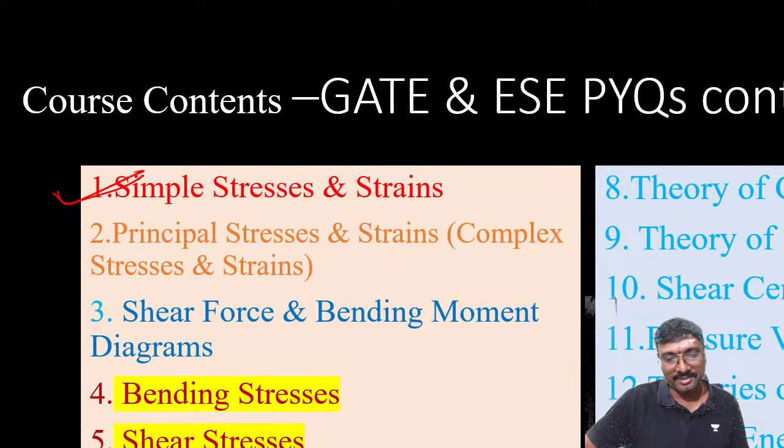Now coming to this. So we'll be starting with which one? This is the first chapter, simple stresses and strains, right? So this is strength of materials, GATE and ESE PYQs. Properties of materials and simple stresses and strains you are having, right? And now this is the first question. Try to select the answer, all of you. I'll be starting the timer.

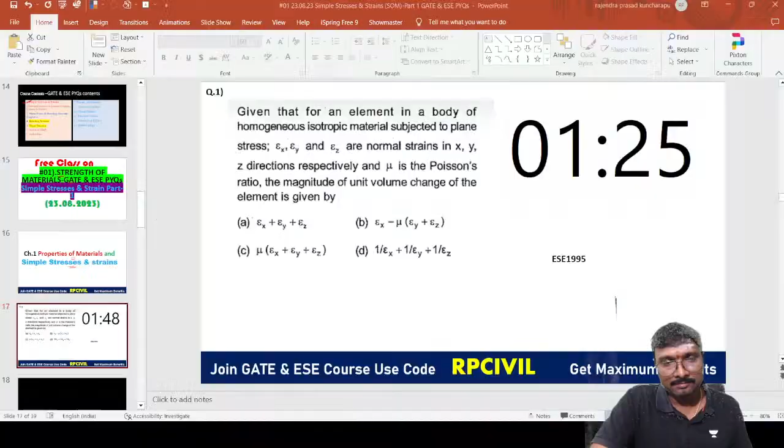Some problem occurred here. Okay, let it be. We just try to solve it, everyone. One sec. Video capture, okay. One second, now it will come. Now it's looking clear, yes or no? Now it should be working. I'll give the timer for this, all of you. Reset and start. Now also it is showing half only. Arey yaar, why? It is not visible now.

Okay, this question is visible, right, everyone? So question is visible now. You just solve this question and tell me the answer. Which one is the correct answer? Stunning Tunes said A is the correct answer. Okay, we'll just check which one is the correct answer. 40 seconds more time is available. Anyone else tell me any other answer?

Given that for an element of a homogeneous isotropic body subjected to plane stress, epsilon x, epsilon y, epsilon z are the normal strains in the x, y and z directions respectively, and mu is the Poisson's ratio. The magnitude of the unit volume change of this element is given by? So what is the meaning of unit volume change? Unit volume change is nothing but delta V by V.

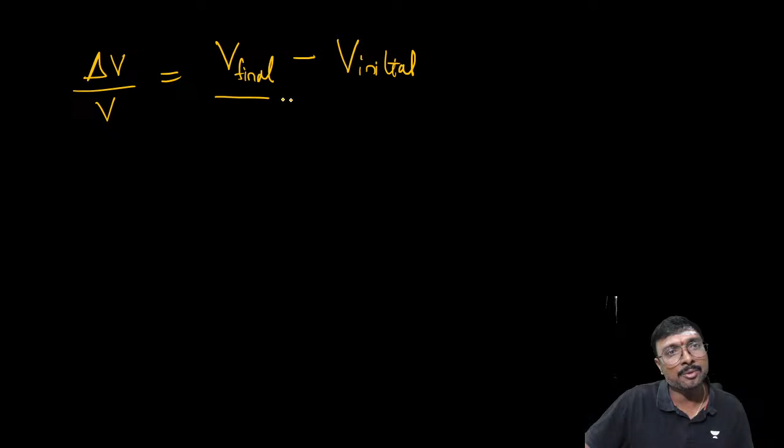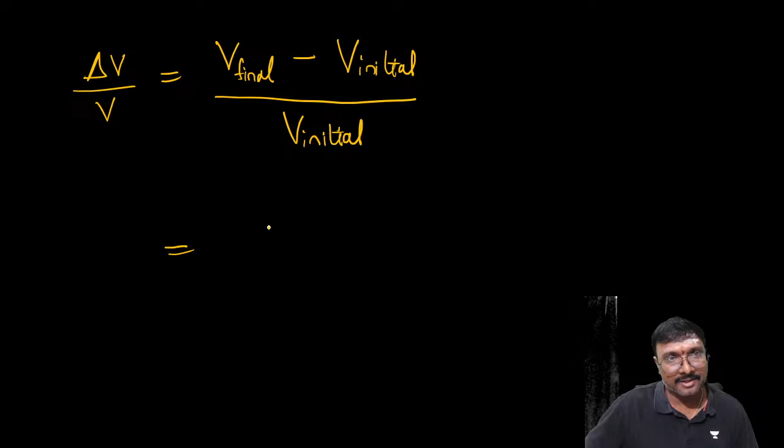So what is delta V by V? We can say it is final volume minus initial volume, divided by the initial volume. So what is the final volume, everyone? Initially it is L into B into H. So the final volume is length into what?

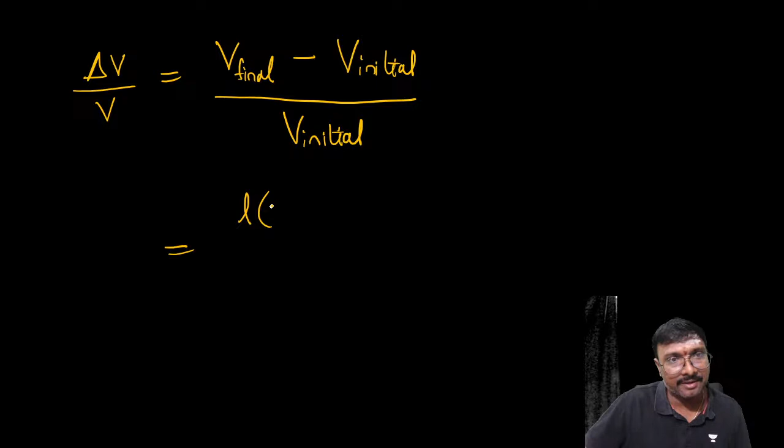Length into 1 plus epsilon x, into width B into 1 plus epsilon y, into depth D into 1 plus epsilon z. So that is the final volume, right? Minus the initial volume, L into B into D, divided by the initial volume.

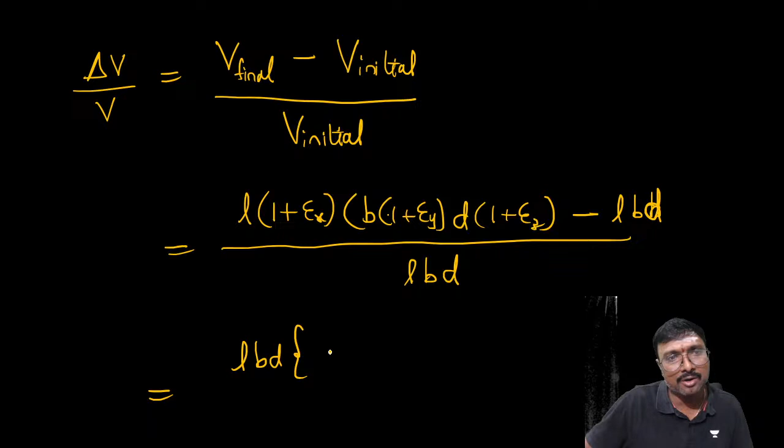L into B into D, right? If you just take common, what is it? You can take common LBD. If you take common, 1 plus epsilon x into 1 plus epsilon y into 1 plus epsilon z minus LBD, length into width into depth or height, divided by this LBD. So we can cancel this LBD everywhere, right?

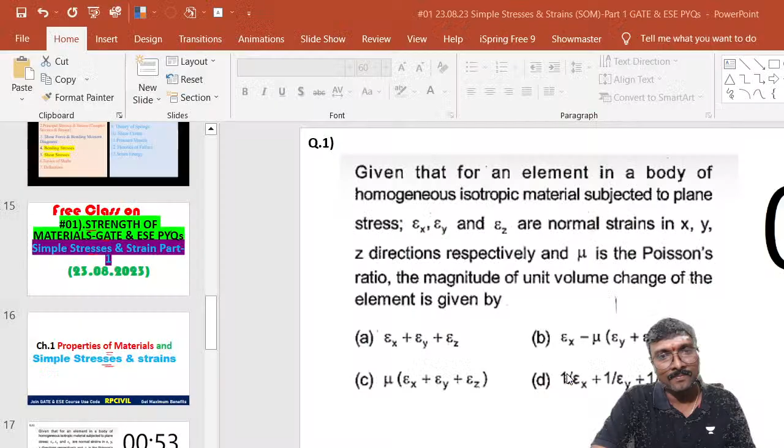Now if you simplify that, what is that you are getting, all of you? Anyone tell me? One plus epsilon x plus epsilon y, right? If you simplify this, it is 1 plus epsilon x plus epsilon y plus epsilon z.

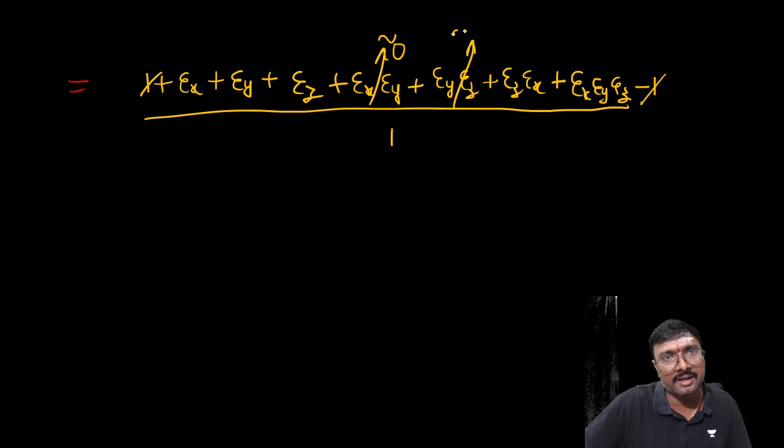1 plus epsilon x plus epsilon y plus epsilon z plus epsilon x into epsilon y plus epsilon y into epsilon z plus epsilon z into epsilon x plus epsilon x epsilon y epsilon z, minus 1, right? So this minus 1 and that plus 1 cancel, divided by 1. As these terms are approximately neglected to 0, finally delta V by V, that is your volumetric strain, will be equal to epsilon x plus epsilon y plus epsilon z. This is the first method.

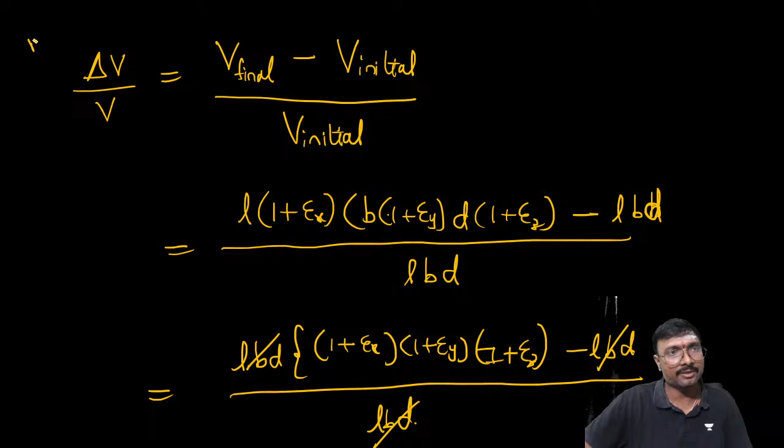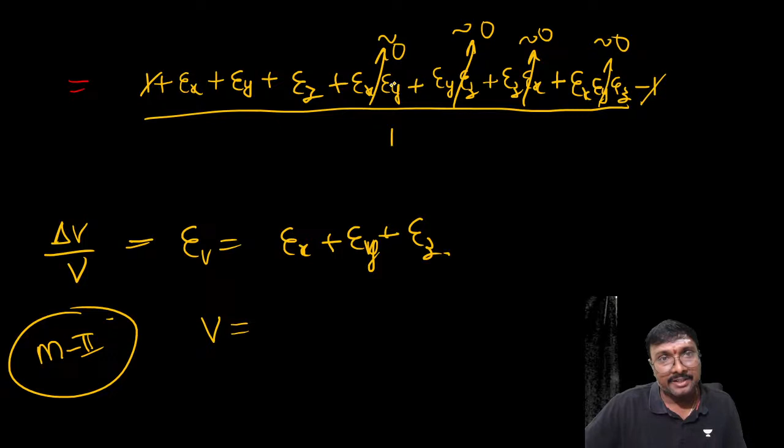Now the second method. Mu is also there, but there is no use of this mu. Element of a body in homogeneous normal strains in x, y and z directions respectively; volumetric change we have to find out. These product terms are neglected to 0, because strain itself is very small, like 10 power minus 5 or minus 6. When you multiply two 10 power minus 5 values, you get 10 power minus 10, which is negligible. Even if you consider it, it does not have any influence.

Now volume is equal to x into y into z. Now tell me, what is dou v? First you consider x and y separately and z separately. Do you remember that differentiation of uv will be equal to first term as it is into dv plus v du? Do you remember this, all of you?

So u dv: first term as it is, x into y, into differentiation of z, which becomes dou z. Plus you keep this z as it is into differentiation of x and y. Differentiation of x and y means again the same concept we have to apply here. How can you apply this same concept here?

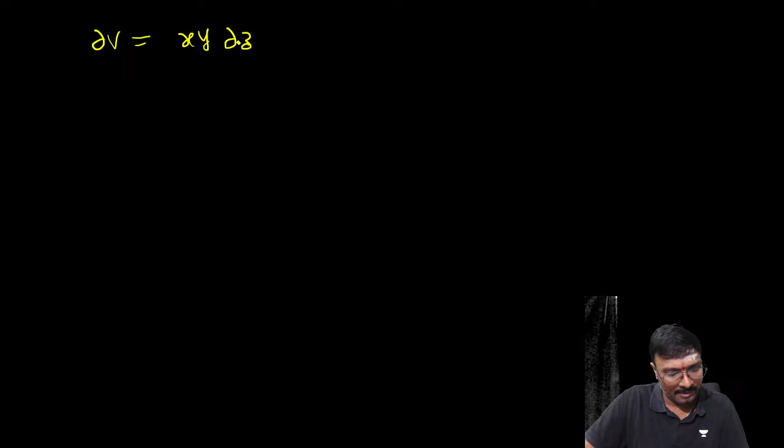So dV will be equal to, what is the first one? xy into what? dz. xy into dz plus z into what? Differentiation of this xy. So first term as it is, that is x into differentiation of this second term, y, plus the second term y as it is into the differentiation of this first term, dx, right?

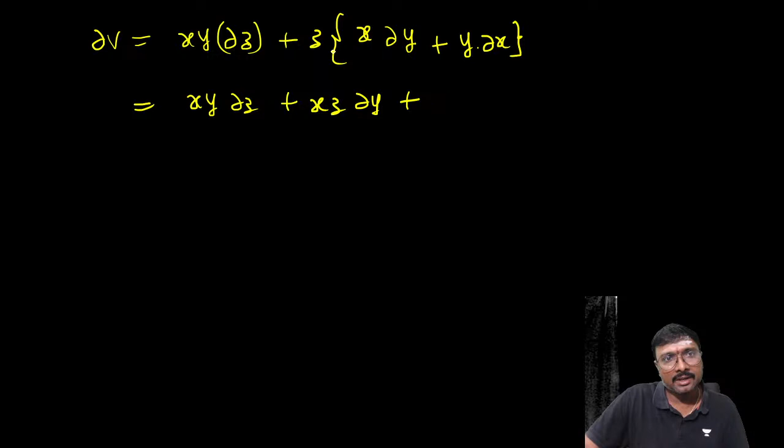If you just observe, what are you getting? xy dz plus xz dy plus yz dx. That is your dV. And tell me, what is volumetric strain equal to? That is your delta V divided by this volume, or this dV divided by this volume.

What is dV? xy dz divided by this volume, which is nothing but xyz, plus xz dy divided by xyz, plus yz dx divided by xyz, right? Now if you simplify this, what are you getting?

This xy cancels, so dz by z, plus this xz cancels, so dy by y, plus this yz cancels, so dx by x, right? So the volumetric strain is epsilon x plus epsilon y plus epsilon z.

In our plus class we have done this kind of discussion, if you remember it. Clear everyone? Epsilon x plus epsilon y plus epsilon z will be your volumetric strain. Unit volume change is nothing but your volumetric strain only.

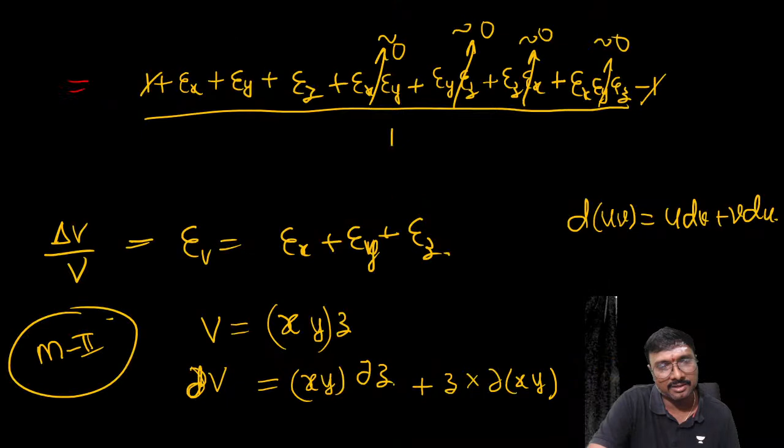So which option will be the correct answer here? Option A will be the correct answer, right? Is that clear everyone? Shall we move to the next?

Last slide, okay, note it, and I'll go. Those who are attending SOM plus classes and have forgotten the concepts, you can come and attend these, because it is also like a revision. When solving the PYQs, I'll explain the corresponding concept, so you can recollect. First we'll go with ESE PYQs, then the GATE PYQs.

Done? Shall I move to the next question? Second question. The timer is started already. 1 minute 54 seconds. What is the answer for this question? Anyone remembered? Sai Teja, Shruti Lakshmi answered B. What about the others?

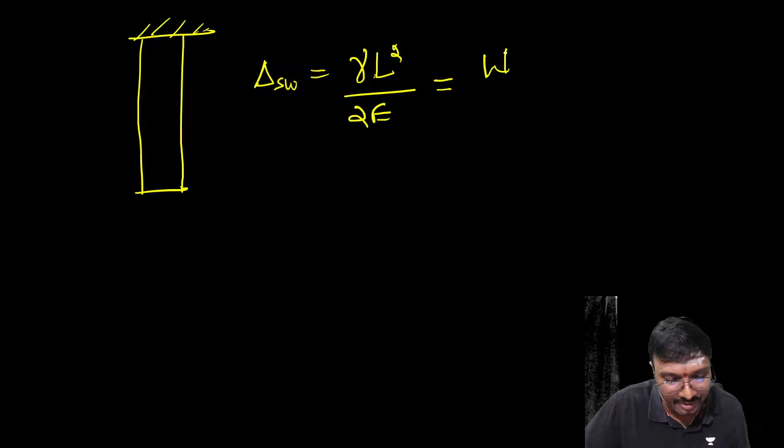Shall I go for the derivation or no need? So here, if you just observe, delta, the elongation due to self weight, will be equal to which one? This is gamma L square divided by 2E, or you can also write it as WL by 2AE, right? WL by 2AE we are having, right?

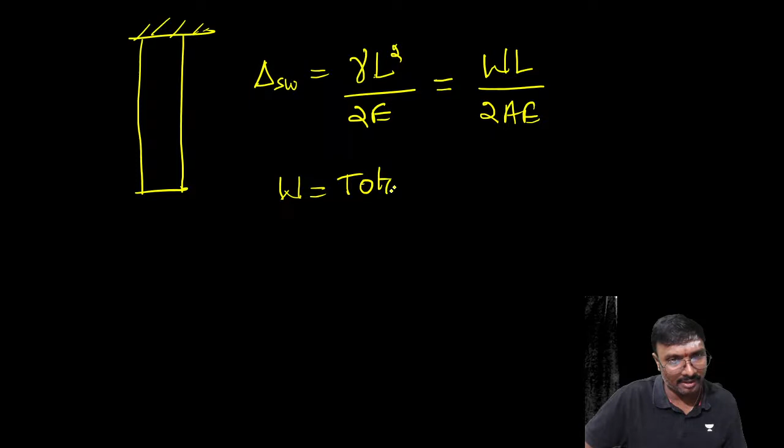So what is W? W is nothing but your total self weight, right? Which formula is matching with that? Rho L square by 2E, na? Yes or no? Gamma L square by 2E, right? So this is matching with which one? This option B only, right? Yes, na?

Is that clear, everyone? Shall I go for the derivation or no need? No need, na? WL by 2AE or gamma L square by 2E, you can remember any one. Because the self weight W will be equal to gamma into volume, and the volume is area into length. WL by 2AE, in place of W you substitute gamma into AL. A and A cancel, and gamma L square by 2E will come. Is that clear?

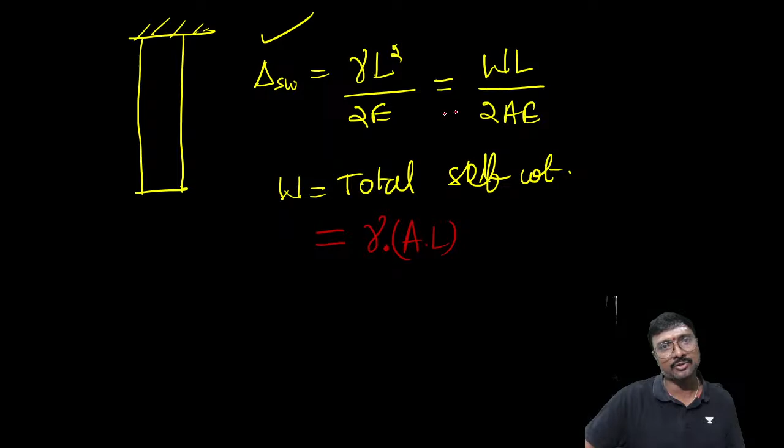Right. This is your question number 3. This is also ESE 1995 only. So I'll be starting the timer, everyone. Is everything visible? Ratio of the forces of the spring at A to that of the spring at B. Are they visible? Options are not visible, na? No problem. You just solve this. I will be giving a 2 minutes timer.

Here the timer is running, but it is not displaying fully. Okay, let it be. Spring at A to that of spring at B. 1, 2, 3, 4 are the options. So I'll be writing the options here. Option A is 1, option B is 2, option C is 3, option D is 4.

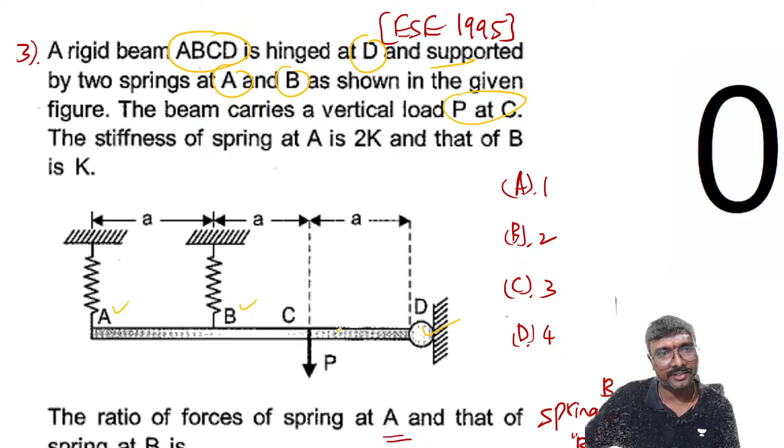The rigid beam ABCD is hinged at D and supported by two springs, one spring at A, the other spring at B, as shown in the given figure. The beam carries a vertical load P at C. The stiffness of spring A is 2K, that is Ka, and that of B is K, that is Kb. Then the ratio of the forces in the spring at A to that of B is? Now if you just consider, at this place it will be hinged, na?

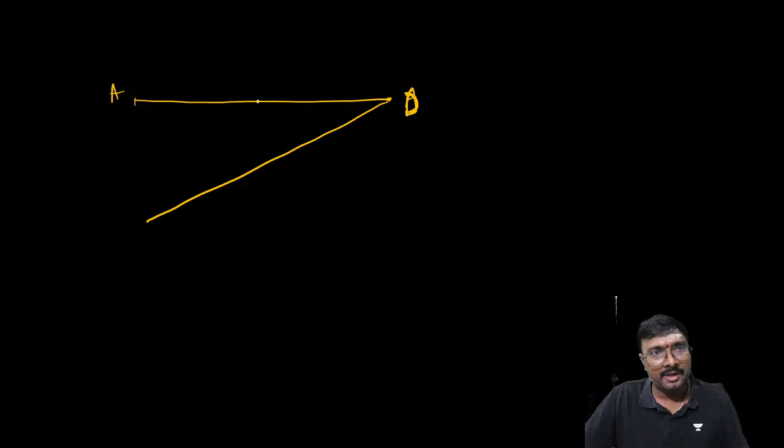That is A you are having. Sorry, this is D. That is a D point, you can say. And where are the A and B points? A, B and C are there. This is your A point and this is your B point, and somewhere here C is there, right? Now they will be subjected to deflection like this only. This is your delta A, and this is your delta B.

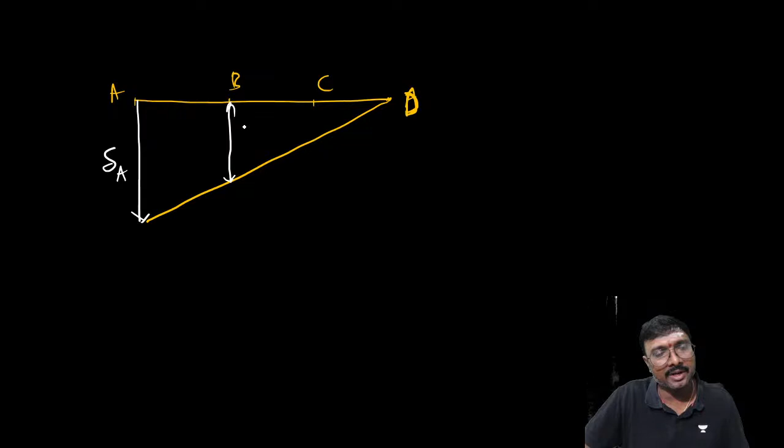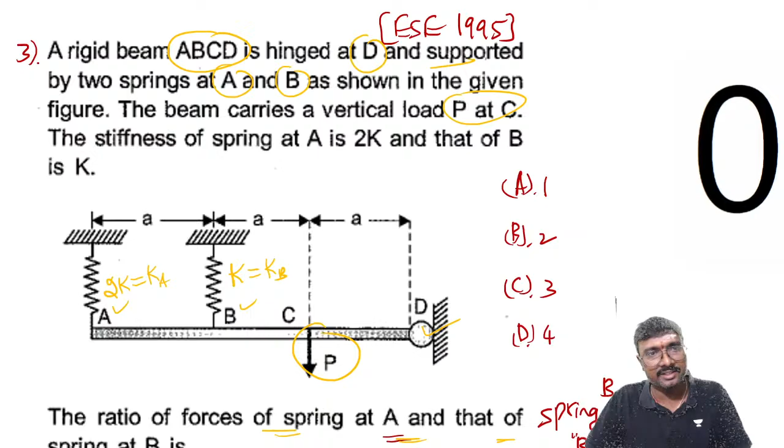Now if you observe, what is the spring force you are having at this place? The spring force in spring A is Fa. The spring force in the second spring is Fb. Is that clear? This Ka will be equal to 2K, and Kb will be equal to K. And what are these distances? From here to here it is A, from here to here it is A, and from here to here it is A.

Now if you consider this theta, from similar triangles tan theta will be equal to delta A divided by the total distance, 3A, equals delta B divided by 2A. Now tell me the relation between delta A and delta B. Delta A by delta B is equal to 3 by 2, right?

Now tell me, what is the force in spring A? That is Ka into delta A, and the force in spring B is Kb into delta B. Now if you take Fa divided by Fb, force in spring A divided by force in spring B, you get Ka by Kb into delta A divided by delta B. So what is Ka by Kb?

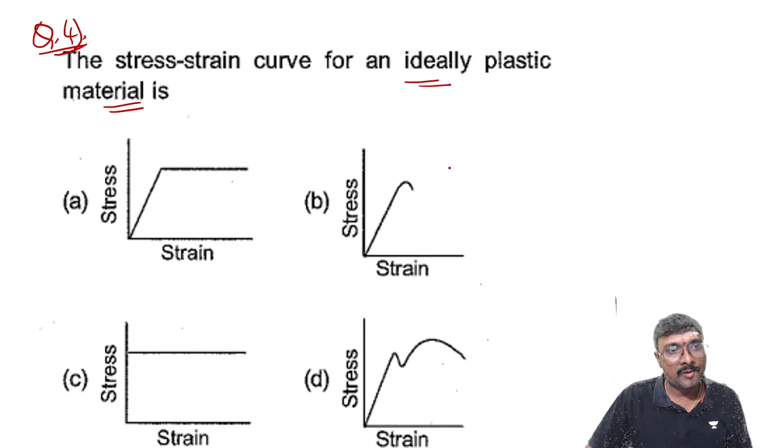The stress strain curve for an ideally plastic material is, right? What is an ideally plastic material? Everyone tell me. Aparna said C. Any other answer by others? This is also from ESE 1995 only.

Ideally plastic means what? Without increasing the load, it deforms. So now load is not increased, stress is not increased. Stress is not increased, load is not increased, but strain will be increasing. This is only ideally plastic.

Now what is the first one you can say? It is your elastic plastic. It is up to this, it is elastic, linear elastic. Linear elastic and this ideally plastic.

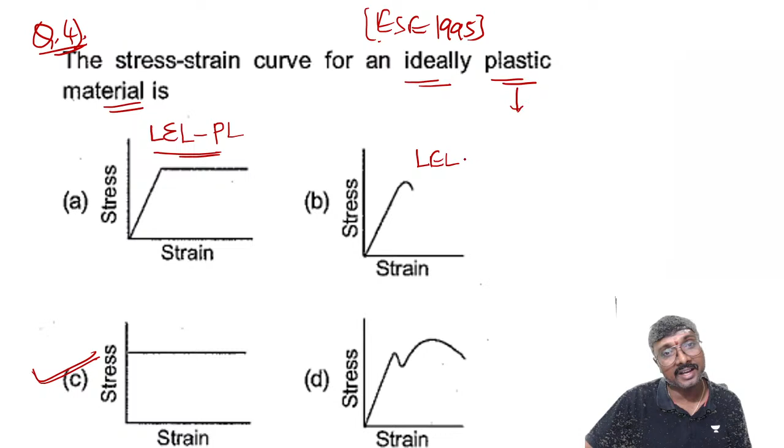This one, what is it you can say? This is a linear elastic and which one? Linear elastic and strain which one? Softening. Strain softening, right? Linear elastic, strain softening, you can say. This is your full stress strain curve. This is full curve, right? You can say full stress strain curve you're having.

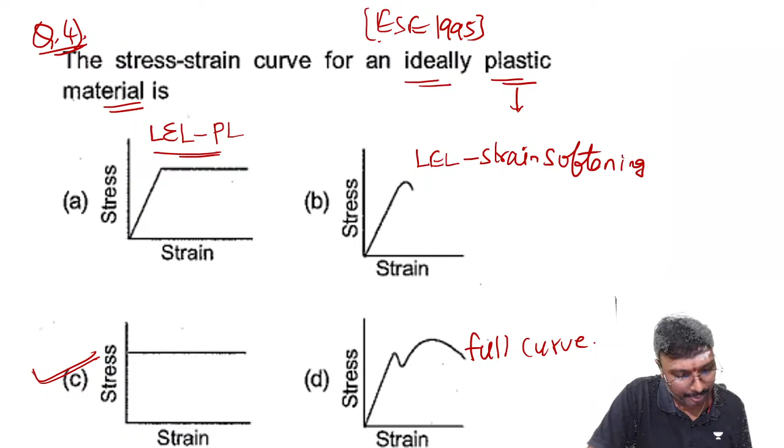Like that. Is it clear, everyone? So shall I go on to the last question, 5th question for today? Clear, everyone? I'll be moving on to this 5th question, last question.

This is your question number 5. This is also same ESE 1995 only. Try to answer this, all of you.

Okay, I'll start the timer. I think time is visible only for me, not you. I'll just tell you the time, don't worry. Tomorrow I'll try to make it visible like that.

Shruti said A. Any other answer by others? Messi Sai Teja also said A. 1 minute more time. You are following Sai Teja? But in the examination, he will not be sitting in front of you, right? Sai Teja, will you be sitting in front of Messi in the examination? No. Yes, it's impossible.

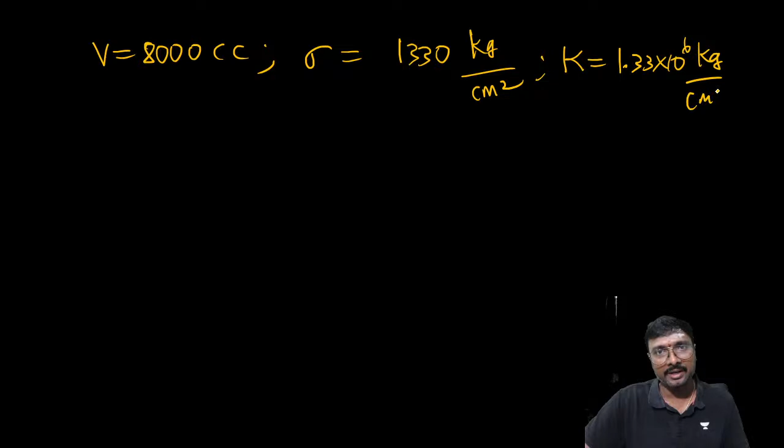So bulk modulus is given, volume is given, and this uniform normal stress is given. Then the volumetric change is - what is that volumetric change if you just observe? Do you remember that everyone? K, bulk modulus, will be equal to normal stress divided by volumetric strain. So that is normal stress divided by volumetric strain, which is nothing but change in volume by original volume.

So how it will come to be? That is sigma into V divided by delta V. What do we want? We want change in the volume only. Delta V will be equal to sigma into V by K. Sigma is 1330. Sigma is 1330 into what is the volume - 8000 cubic centimeters, divided by K which is 1.33 into 10 power 6. Tell me how much you will be getting this change in volume? How many cc, how many cubic centimeters you will be getting? Check it.

Yeah, fluid, SOM, everywhere - it is same only. Fluid mechanics, solid mechanics, everywhere this bulk modulus formula is same only. 8 cubic centimeters is the answer. So is there any option with that? Yes, there is an option. Option A will be the correct answer, right?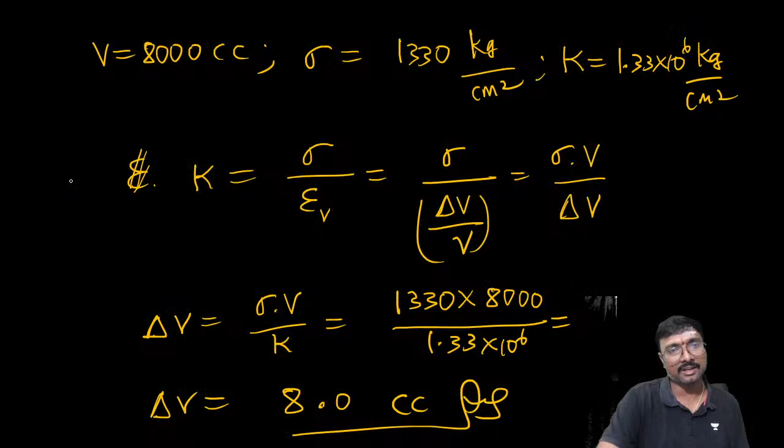Like that. Okay, we'll be closing the session today, and tomorrow we'll be continuing our discussions. Is that clear, everyone? Anywhere? Everywhere is clear? Now see, you need not remember previous one also. Now what you can do? You just attend these classes, then automatically everything will come into your mind. Automatically everything will be revised from your mind.